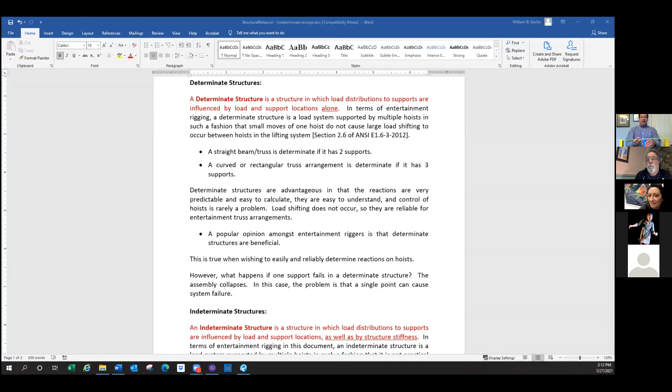I want to give you a real world example, okay? I'm going to move my camera for a moment, so bear with me as I reposition the camera. I hope I get the orientation right. And I've got some toys, okay? I went into the closet and found all the toys that my kids have. And this is a plastic track for a little pinball type thing, and they make a roller coaster out of it.

And what's interesting, see this little red thing? This little red thing is a snap-on connector, okay? It has two notches on one side, two notches on the other. You can see that the little green nubs are attached to the red connector with this track in my right hand. To connect the track in my left hand, I'm going to line up those two nubs, snap them together, and now I end up with a spliced piece. That's giving me bending resistance in all directions. Pull apart axial resistance, bending resistance in this direction. It's a full moment splice.

Okay, so I have three supports, right? And the blue's in the middle. If I load both of these, you can see that I have a smile type curve under the loads, which are my fingers, and I have reverse bending over that support. The stiffness of that connection is really helping me out. Notice at the ends, it's just supported in a fashion that can rotate, because there's nothing keeping it from rotating.

Now, interestingly, if I put a load on one side, notice the other side pops up. The weight of the track is insignificant compared to the strength of my hand, and it's just going for a ride. But essentially, this is acting like a hinge support or pin support, ignoring this one. That's what happens if you had a chain hoist condition.

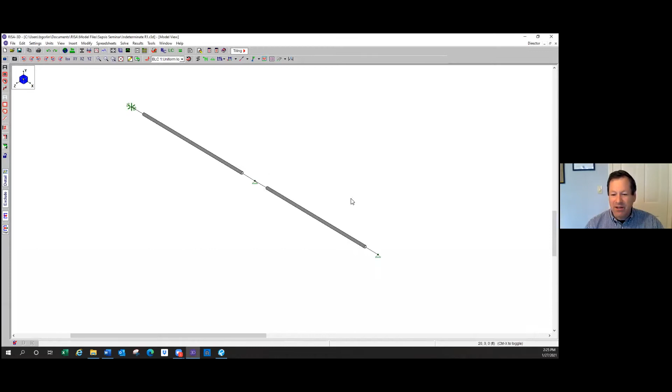This is a program called RISA 3D, and what we have here, you zoom in on this thing, it should have schedule 40 type. I can click and make it look like it has colors, or make it look like a stick. Let's take a look at it from the front. Once again, you see these little triangles representing supports. The one at the end has an extra little symbol to keep it from rotating, but it's the same type of support. And this is an indeterminate structure. It's continuous across the center support.

I'm going to put some loads on it. I'm not going to use that one, I'm going to use that one. So I have two spans of 10 feet. I have loads of 100 pounds apiece. If this was a determinate structure, I could say, well, if I'm mid-span on this truss, half the load is going to the left, half the load is going to the middle support. And then for the other 100-pound load, half the load is going to the middle support, half the load is going to the right. So my reactions would be 50, 100, and 50.

Actually, what I'm going to do, I'm just going to modify this model right now. And I'm going to say end release.

Can you see this, or is it too small for you, folks? Bill? It's fine. Fine, okay.

Right now it says fully fixed. I'm going to click pinned and pinned supports, which is a hinge type behavior. And you can see there's a little circle there that says, hey, this is hinged. I'm going to do the same thing on this side. Now I'm overdoing it at the supports, which are already hinged, but it's a nice graphic. So I'm doing it. And then I'm going to run this model.

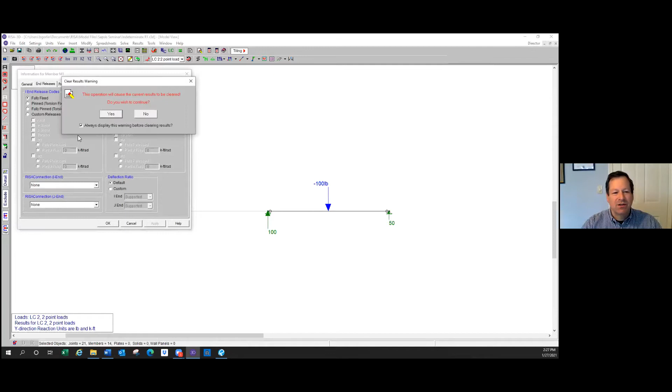Okay, now we're going to run the same exact analysis. And look what happened. The middle attracted more load, and the ends gave up some load. And that is a result of the indeterminacy of the system. Now, we structural engineers would say that you generally lose 15% of the reaction at the end when your next support over is fixed. And we actually lost more than 15%. It was actually a pretty substantial amount that got dragged over to the middle. So you can see it's wreaking havoc.

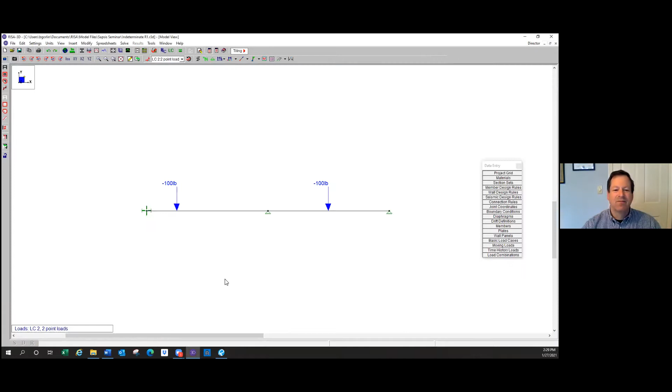If I played around with my loads, oops, that's on the wrong screen. Let's get it over here. Also on the wrong screen. Let's say I screwed around with my loads a little bit. I'm going to move this load from halfway on the span to, oh, that's good enough. I think I got it right. Yeah, there we go. Now I shifted that load over. I'm going to go back to a pin condition.

Okay, so once again, same span, same loads. The one on the left moved closer to the left. It's now 25% of the span over. So I would assume, if this is 25% of the way over, it's 75% of the load that's going to go to the end here, which is 75 pounds. And the remaining 25 will go to the middle. And then this other 100-pound load will split 50-50. Let's take a look at that.

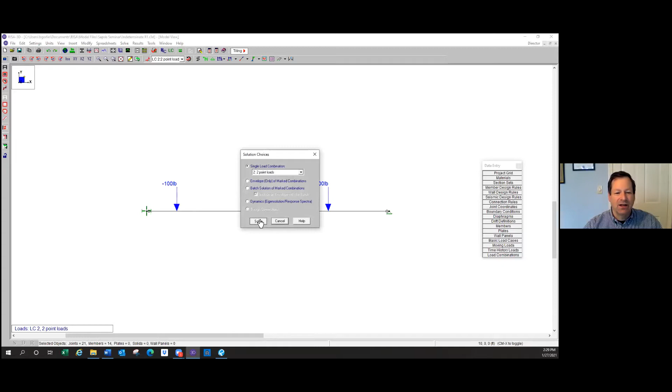Yep, there's my 75 that I predicted. This 75 is equal to 50 from the right side, 25 from the left. Easy to predict. Now let's make it fixed again. Let's run it again. Okay. Instead of 75 on the left, it's now dropped down to 60 pounds. On the right, it dropped down to 35 pounds.

If you remember when the loads were centered on both sides, the end reactions were 31 pounds. So this 100-pound didn't change its location or its magnitude. On the left side, the 100-pound moved closer to its support, changed the reactions on both supports, but it actually influenced the reaction on the other side. So it's wreaking havoc with the distribution of loads.

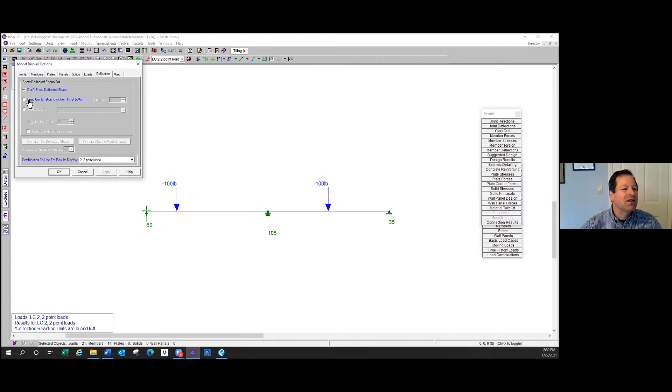I'm going to show you one more thing, which I should have done from the beginning, but I forgot. I'm going to show you a deflected shape magnified 40 times. It's going to be a pretty significant magnification. So you can see that reverse curvature over the support, which is similar to the toy, that is influenced by the stiffness and influenced by the location of this thing.

Bill, do you have any questions from people? Because I have to tell you, I could go on for hours with this stuff, exploring lots of ideas. I don't want to bore you folks. You are clearly not boring anyone. Okay. They are hanging on your every word. Okay. If you'll pardon the pun. Yes, hanging is good when using chain hoists. Bill, do you have any questions from the group? I do not have any questions at this time, but let's pause for a second and let me ask.

Well, James Lyle is asking, how would you do the math? And that's the question, so I'm not sure how to interpret that. Well, that's a really good question. How do you do the math? The best way is to hire a structural engineer to do the analysis for you. There are some rules of thumb. Bear with me because I'm winging it now.

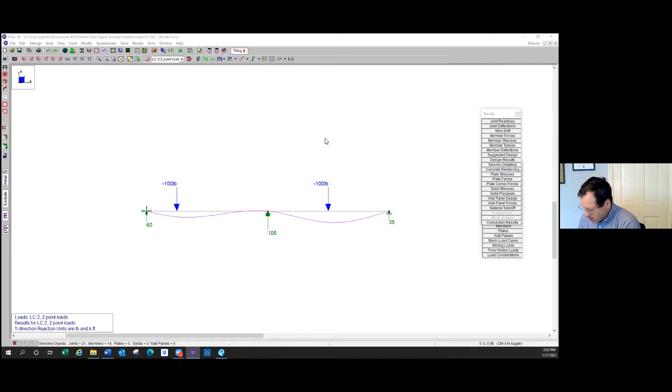Well, here's an example. Let me find a good one. Well, here we go. These books contain useful tables that will give you sort of prepackaged equations for common situations that you come across. So, for example, I'm trying to read this as I'm showing it to you. This is a good one, this one that I'm pointing to with my three fingers on my right hand.

So this one right here, that's a two-span condition like we're dealing with, with a point load at the middle on one side. This happens to be helpful in getting that answer. What you could do in this case is do the analysis for the 100-pound load in the midspan using this one, and the one down below for the load on the left side, and then combine the results.

Hey, Bill. Yes. It's been suggested if you want to unshare your screen, it'll be a lot easier to see you and the book. Oh, that was really kind of dumb, wasn't it? I don't know if you want to go back and forth or not, but. Yeah, I can do that. Okay. Can you see me now? Oh yeah. Okay. Sorry. All right. Let's start that again. You should have said so earlier, Bill. Well, okay. I was listening.

Okay. So, Manual of Steel Construction. This is a very old one, but it's the one I happen to have here in the house; my newer ones are at the office. But all of them have a bunch of tabs, and the tab I went to is the beam section. You'll find this in lots of structural engineering textbooks and manuals. I wouldn't be surprised if Structural Design for the Stage has these tables, and there's a whole wide range of tables. Some of the simpler ones at the beginning give you basic beam equations.

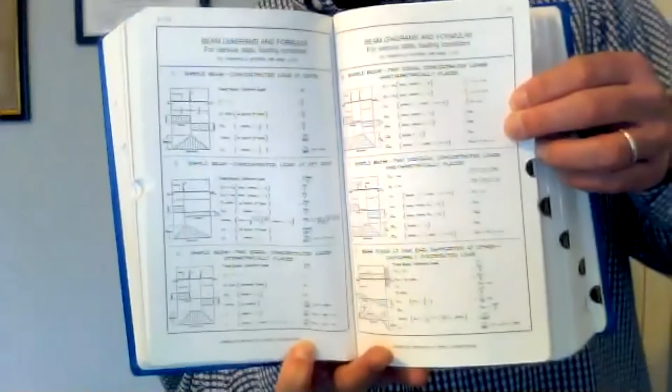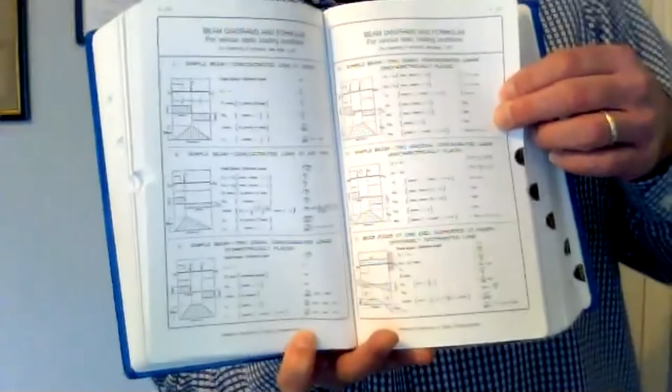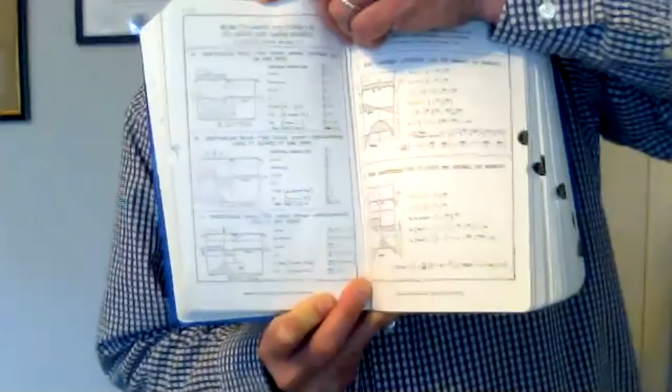There's a load at mid-span of a simple span beam, then one load anywhere on the beam, and two loads on the beam, and all these useful tables that give you the reactions, the bending moments, and the shears. If I go farther along, there are some examples with two-span conditions on this page. A nice example is the one in the middle. That's the one I've been analyzing, actually: the two-span indeterminate system with a point load in the mid-span of one side. That can be used for the 100-pound load we have on the one side. Those are the results you would get for that load.

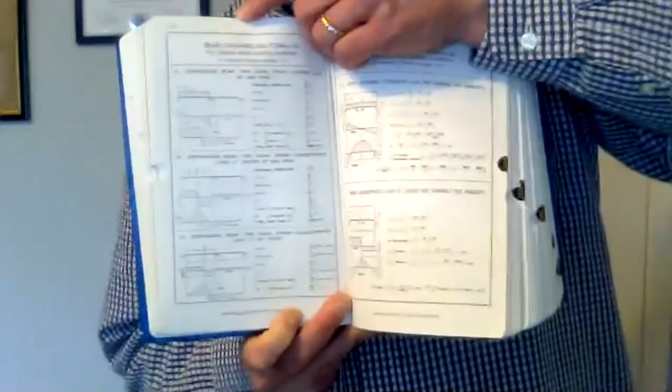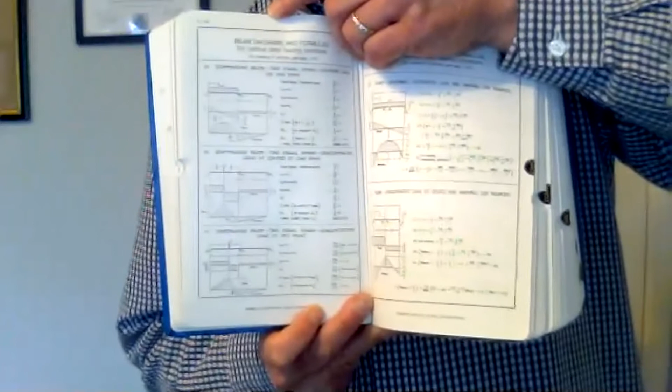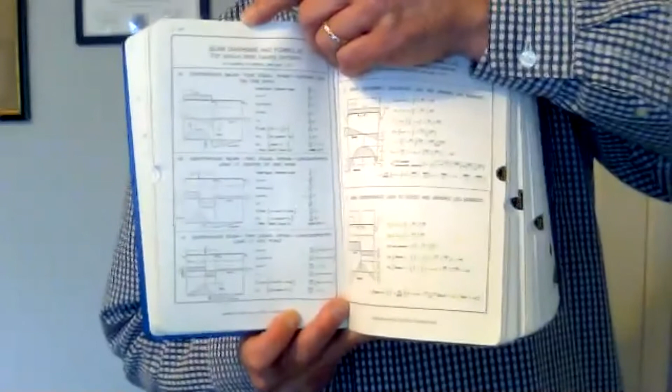The one on the bottom is a more generalized condition of a single load anywhere on one of the two spans. That can address the one where we're 25% of the way from one end. You can just combine the loads. So these are very useful tools. It doesn't give you everything, but it definitely gives you some help, and it also gives you a flavor for how the behaviors change as you use these different types of loads. There's another useful table.

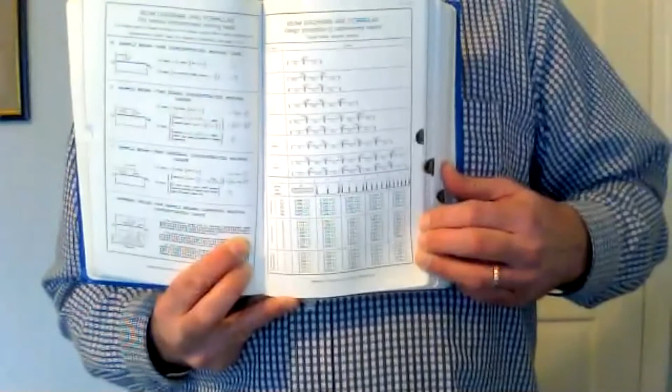This table here, if you ever see this in the steel manual, is a bunch of multiple spans and multiple loads on spans, extrapolating a uniform beam to multiple point loads. And eventually, if you have an infinite number of point loads, that's a uniform load. So these are some useful tools to at least help you get there.

Okay. I have a couple of questions from the audience, from the group. Go for it. Okay. Gotta scroll back here.

Lucas asks, a lot of times other departments do not want you to move their gear. Would making offset bridles at the ends help? I think he's referring to your indeterminate three hoist structure with one of your loads closer to the end. So, Lucas, correct me if I'm wrong, but I think he's talking about taking a bridle down from the hoist rather than just a sling straight to the truss, bridling the hoist down to the truss with unequal leg bridles. Correct, offset bridles. Oh, I see.

I have a picture here. You want to show the picture? Oh, should I share that? Oh, it says unable to participate. Yeah, we just saw you. Look, yeah, there you go. Yeah, okay, I see it.

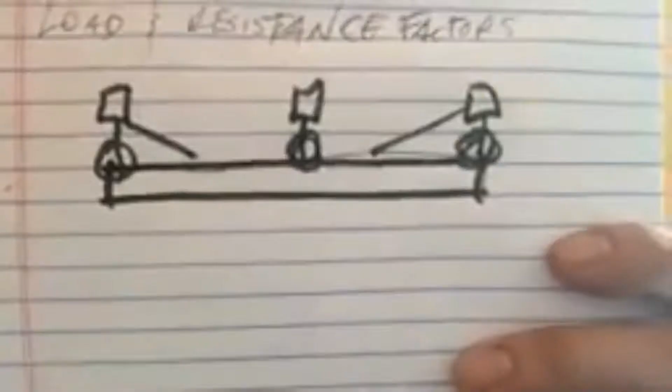Like that to help with that center pick. Yeah, that can be very helpful in a couple different ways, right? What you're doing is you're helping pick up that truss if you have a flexible truss. It also gives you sort of an alternate load path. As the truss flexes, that bridle going to the center part of the truss is going to help pick it up better. It's going to give you some redundancy. So yeah, it can be helpful.

It's really hard to figure out what's really going on with that, because not only are you dealing with the flexibility of your truss, but you've got a chain hoist that's hanging up in the air, and you have the possibility of pulling it sideways a little bit as a load is pulling it. So I think it can be very helpful to take some of the deflection out of the truss, if that's your objective.

But say if we know that audio or lighting say, we have to have this specific position here. We know that it's that specific load. We know that motor's gonna take a lot more capacity than the other two, and we did the math. That would be a viable option though, right? That's a viable option. That's a great approach. I agree.

Let me point out, if I may. Eric brought up a point, and I share his concern. Depending on the loads, I would be worried about the tension on that very flat path, that very flat bridle. You have to pay attention, is what I think Eric is saying, right, Eric? Sorry, had to mute. Yeah, exactly. I think it could be a viable solution for some situations, but depending on the loads. Plus, it's also going to pull your hoist out of plumb, and there's a bunch of other things it's going to do. It's going to do some weirdness there.

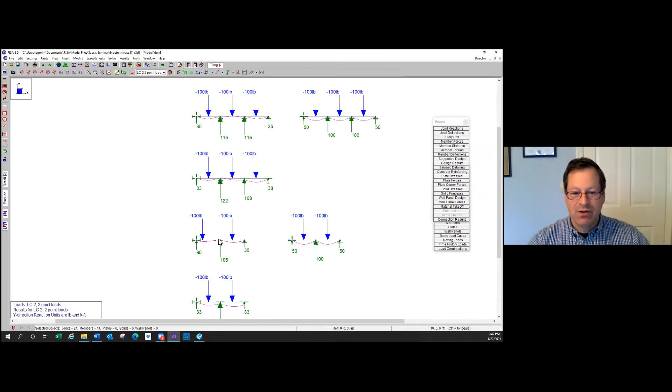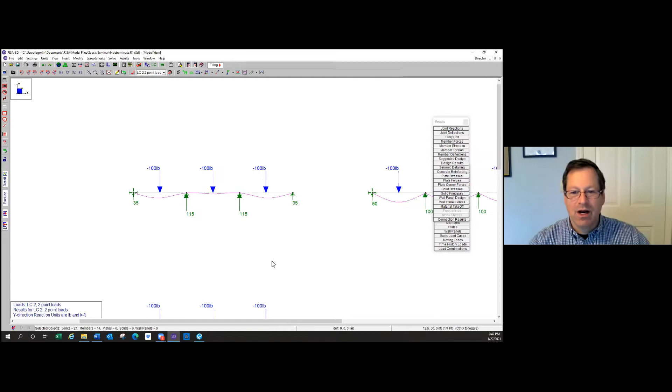Just in case you guys are curious, I've built up a whole bunch of models in here and could go through a whole bunch of examples. Here's our 2-span continuous, which is the one we had been looking at. And if we wanted to extrapolate that to a 3-span, this is one of the examples I actually showed in the book, where those 2 intermediates do a lot for you. And here's an example of a 3-span where each one is hinged.

And you can see not only does the one where all are hinged or pinned have very predictable reactions, but you can also see the deflections are significantly more for the same member. Same span, same load, same member, same material, same everything, except this model has pins. And in this model on the left they're continuous over the supports, and that has a much stiffer reaction. Okay.

The only other thing I'm going to throw at you, and I don't think we have time for this, but we could get into it later, is what happens if your supports are springy? Okay, this model on the bottom compared to the one on top, these are identical. Same member, same material, same load, same span, continuous over the supports. The only difference is the 2 supports on the right are springy, meaning if I put 1,000 pounds of load on them, they mathematically deflect 1/2 inch or 1 inch, something like that.

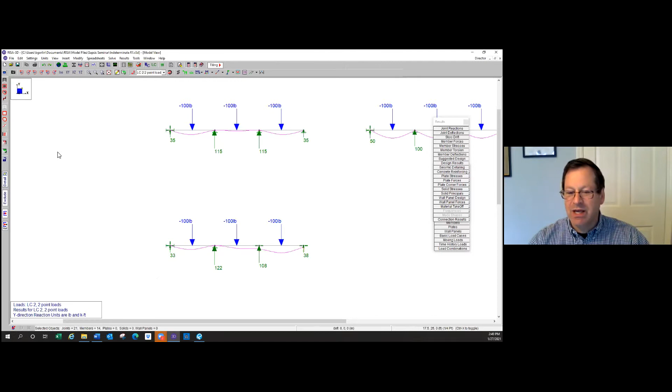How would this relate to what we do? Well, let's say you're in an arena, and let's say that in this hang condition, the 2 left chain hoists are connected to the primary roof truss, and the 2 right chain hoists are connected to very minor beams in the midspan of those beams. And those might be quite flexible beams. Well, that flexibility is going to influence the behavior of the whole thing, which also relates to the flexibility of the truss that I'm hanging, which then influences the reactions.

So it can get doubly crazy, okay? And it's just something to look out for. So when you're rigging in an arena or any environment, just be mindful of the stiffness of what you're rigging to.

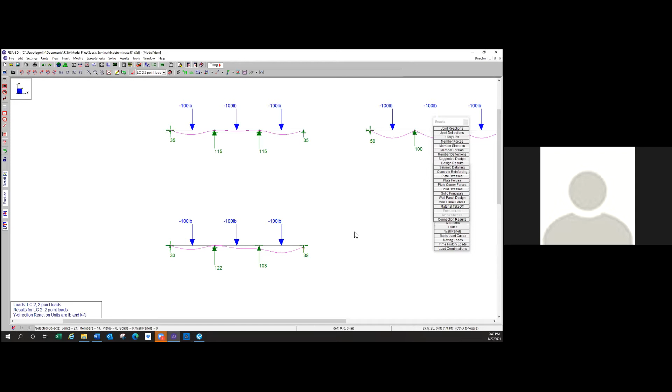I have a question from Hugh. How does a bolt connection or a spigot connection affect the stiffness of a truss section? Great question. I'm glad you asked, Hugh. A spigot, okay, there are engineers out there who would tell you that you can only use spigot connections because that's a real truss splice, and then the end plate connection is bogus, it's foolish, you should never use it. And okay, that's from the perspective of structural purity.

Okay, the spigot connection gives you direct connection from chord to chord of a truss. So therefore it's much stiffer. It utilizes the capabilities of that truss much more than a plated connection. A plated connection, the load goes through the chord, then it travels down through that plate, and the plate's flexing into the bolt, into the next plate, that's going to flex to bring load back up to the chord. That's at the top chord. And the bottom chord, you've got the same, but in reverse. It's much more flexible, and you're not utilizing the strength of that truss.

So, for example, from my recollection, we've seen that spigoted truss is more than twice as strong as plated truss for the exact same truss. And it's all about the connection. Okay, stiffness wise, the spigoted truss is a little more stiff because of the nature of the connection, but it matters whose truss you get. Some plated trusses are reinforced with an angle instead of just a plate. Those might be a little bit better.

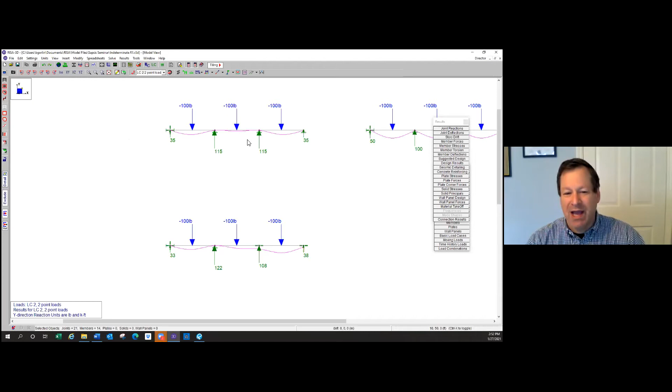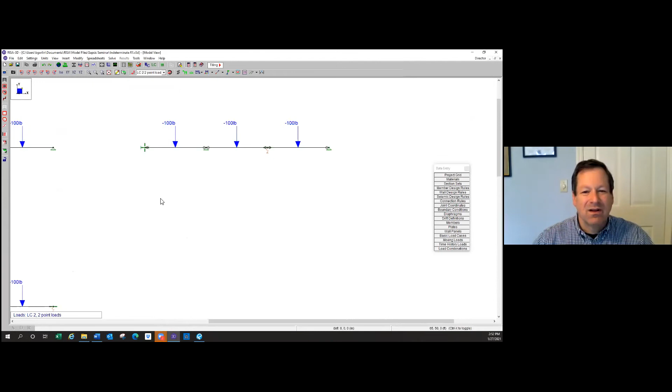Anyway, this example here about the springiness of supports can get really wacky, but I think it was important to show you the difference between purely, infinitely stiff supports and the reactions versus springy supports and the reactions. I'm going to give you one little additional example. I'm going to take this support, this is the pinned one that we're looking at here, and I'm going to make it a really springy support. Okay. You see that little springy icon on there? And now I'm going to rerun the model.

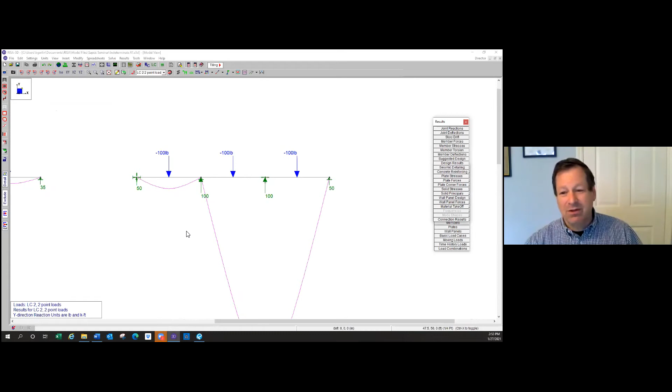Yep. It deflected a whole lot. But because each span is determinate, the loads didn't change. Not at all. Even though it's stupidly flexible. Okay. So anyway, that's the moral of that story.

I should probably stop here because this can go on, but I'll keep the software open so that nobody else at McLaren steals it from me because we have floating licenses. Okay.

So with no further ado, Bill, is this a good time to switch to you? Yeah, we can do that. We can do that. Yeah, I'm going to stop my share.

Okay. Well, let me share my screen. Get the desktop here. We go riding through Death Valley for a second. Go from one desert to the other. Right. Come on. Get rid of my chat here for a sec.

So let me give you the run up to this video. This video was made in 2007 in Tel Aviv. And the impetus for this was in the rigging working group in the ANSI standards program with ESTA. We had just started working on a standard for chain hoists and trying to figure out how to write a standard. We realized that there was a lot of information that we simply did not have, and we needed to get that information to be able to write the standard.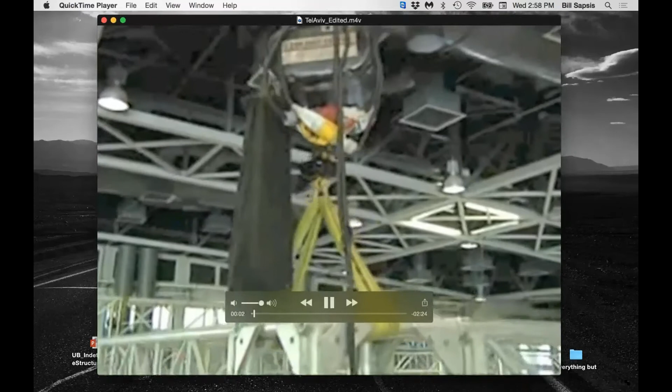In its January 2007 meeting, ESTA Task Group on Chain Hoist Usage decided to have its member, Eilon Engineering, conduct an experiment aimed at measuring loads and load distributions that occur in day-to-day stage rigging scenarios. On March 5th, 2007, an experiment was conducted by Eilon Engineering in the Exhibition Center in Tel Aviv, Israel. The purpose of the experiment was to check the forces and loads involved in acrobatic shows and in lifting and hanging sound and lighting equipment for entertainment purposes. The experiment was conducted in the presence of Bill Sapsis of Sapsis Rigging Installations USA, and with a special system which enables 25 measurements per second.

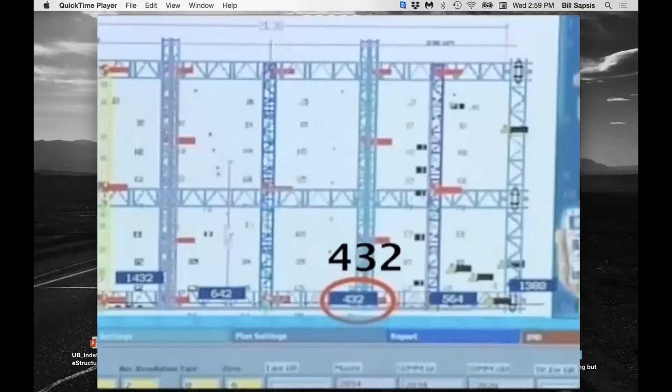Experiment 1. A structure of 1 truss with 3 loads and 3 hoists. Experienced rigging personnel attempted to level and balance the truss. When using the load cells, we could see that the attempts to balance the truss visually resulted in random balancing and imbalanced load division on the hoists. We also noticed that the slightest operation of one of the hoists, even for a fraction of a second, resulted in the addition of hundreds of pounds, while the truss still appeared to be balanced. Conclusion? A visually balanced structure is likely to have imbalanced load division, and some of the hoists might even be overloaded.

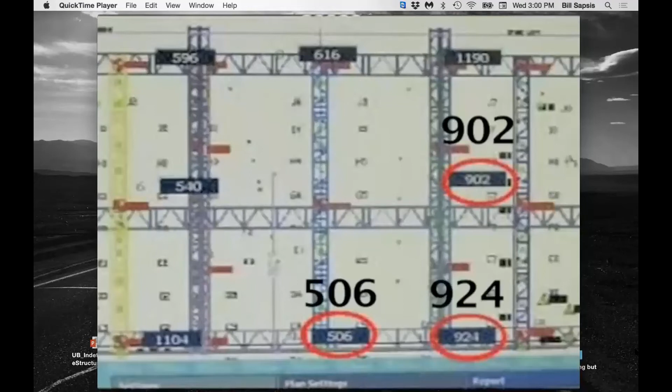Experiment 2. A mother grid structure was erected. The upper grid was suspended from the ceiling by 4 identical chain hoists, simultaneously controlled by 1 switch. 1 load cell was hung in line with each of the 4 hoists. An identical arrangement of grid, hoists, and load cells was suspended from this upper grid. In the experiment, a slight change in the weight of the loads on the lower grid triggered a practically incalculable change exhibited by the load cells.

Conclusion? On a mother grid structure, any changes in the lower grid load or load distribution will usually change the load values and distribution on the upper grid, which in turn might cause an overload situation. And that's that.

Do we want to do that again, or can I give the screen back to Bill? Move on. Okay. Bill, do you want to follow up on that, or do you want me to do a little post? You know, why don't you take a stab at it, and then I'll react to it and give you my thoughts after. Okay. Let me get out of screen share here. Okay, so

The frightening part about that to us as we were evaluating the results of those tests was that what those tests were telling us seemingly was that all of our previous attempts at an equal load distribution were in fact not effective at all. We really did not know what we were doing. We had no idea where actual load distribution was. And this was because it was old school.